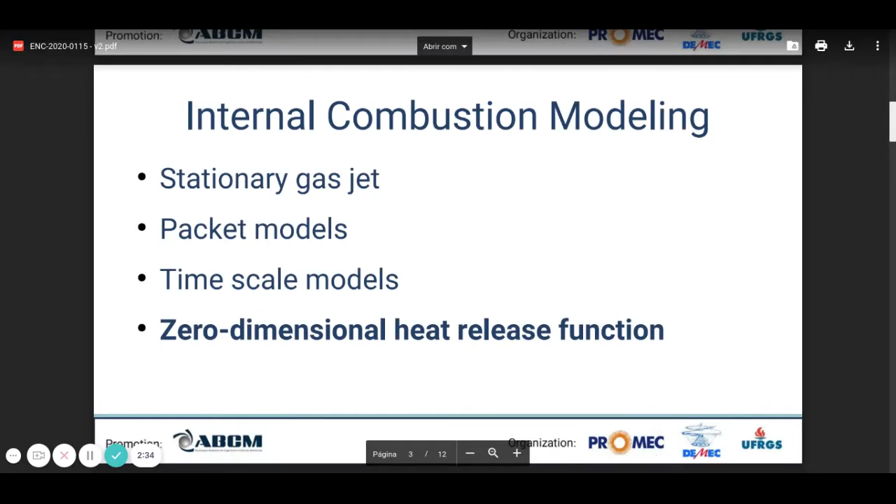Let's talk about commercial software. There are several commercial software for internal combustion modeling. We have Ricardo Wave, AVL Boost, which actually uses a zero-dimensional heat release function, Diesel-RK, and Los Alamos National Laboratory has their own Kiva. This is a very important laboratory in the US.

Here is the schematic of a diesel engine. We have the valves, we have the piston, which goes from bottom dead center to top dead center, and it's connected with a connecting rod, which goes to the crankshaft, and in each stroke the piston goes from bottom dead center to top dead center.

Usually diesel engines have 2 or 4 strokes. In general, diesel engines have 4 strokes, and they are: inlet stroke, compression stroke, combustion stroke, and exhaust stroke.

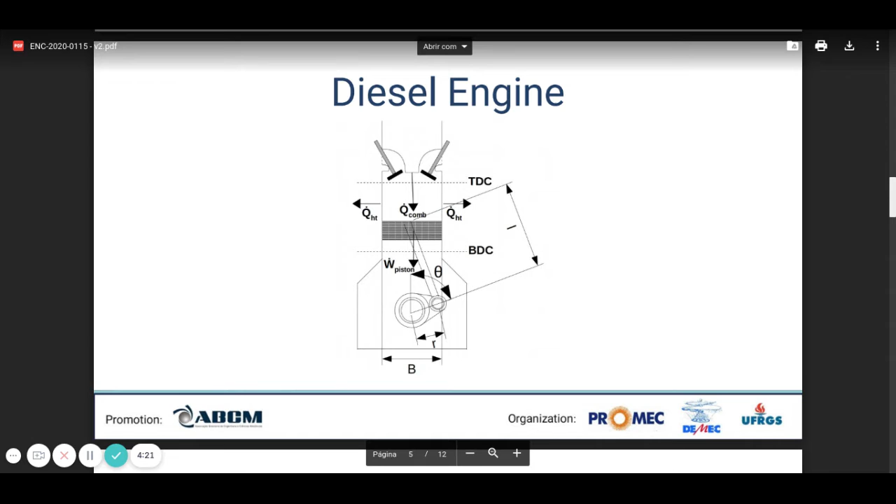But in this article, we are just going to discuss the compression stroke. Following here, we are going to discuss the model. This is the numerical model for the compression stroke of a diesel engine.

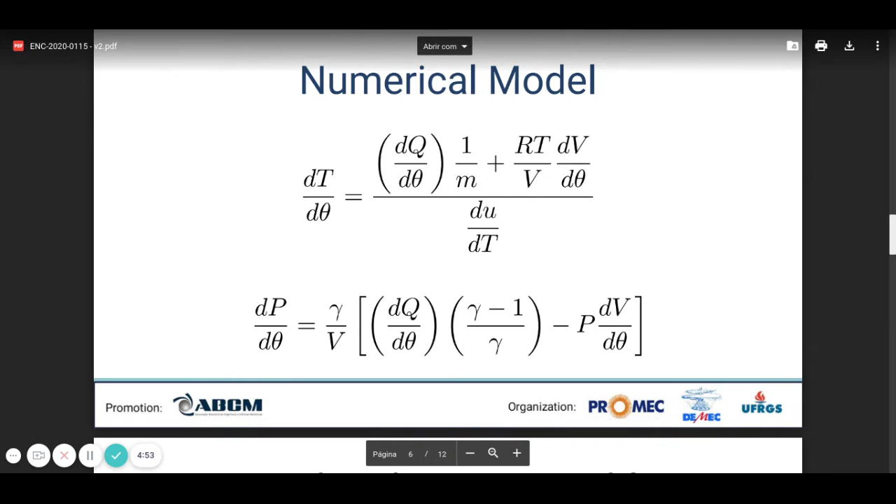As we can see here, we have two ODEs for temperature and pressure, and many parameters here, and we can solve those ODEs using numerical methods.

Let's talk about a crucial difference, very important for the present article. We have the forward problem, which uses numerical analysis to solve the coupled ODEs as we have seen before. So we select parameters, we have the ODEs, and we use the Runge-Kutta algorithm to retrieve pressure data during the compression stroke.

First of all, we solve this so-called forward problem, and we create a pressure curve for the compression stroke, and we add noise with a Gaussian distribution. This is what we call synthetic data.

The main problem here is to solve an inverse analysis. What is an inverse analysis? We have this synthetic data, as mentioned before, which was generated by the Runge-Kutta algorithm.

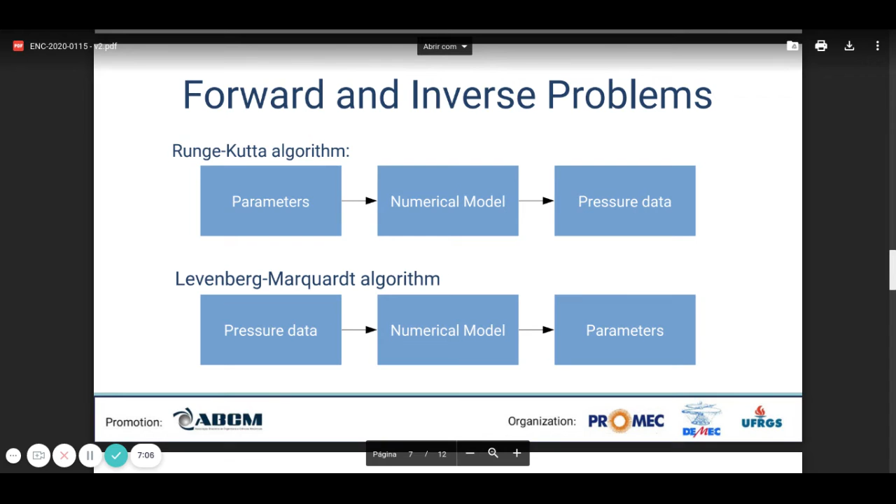We have the numerical model, and we perform inverse analysis using the Levenberg algorithm. With this synthetic data and the numerical model, we have an initial guess for the parameters, and after iterations during the Levenberg-Marquardt algorithm, we retrieve the initial parameters that we used in the Runge-Kutta algorithm to generate the synthetic data.

Here we have the diesel engine parameters, which we have used to create the synthetic data.

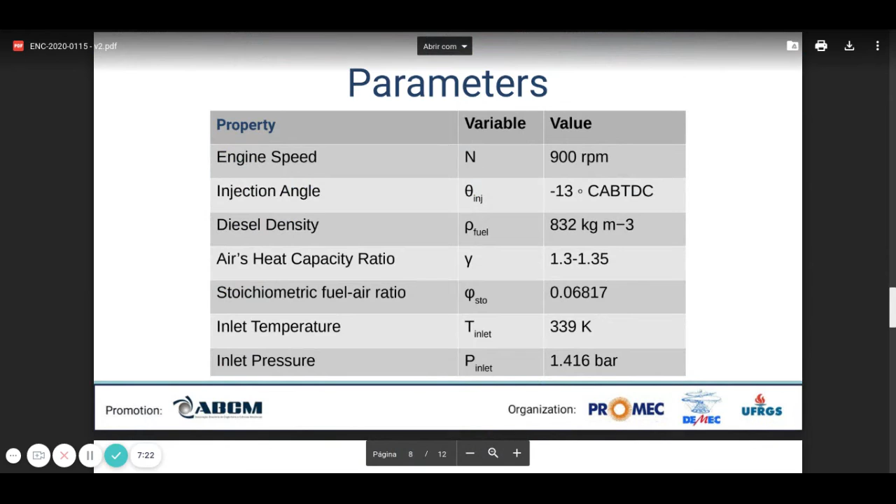As mentioned before, we create the synthetic data using the Runge-Kutta algorithm. We have here an initial guess, which is like 90% of the exact values for the initial parameters of pressure and temperature. As we can see here in row 1 are the exact values used to create the synthetic data.

On the second row we have the initial guess, which is like 90% of those exact values, and the estimated values on the third row. On the fourth and final row, we have the relative error from the retrieved values. As we can see, the relative errors are less than 5% for both of the parameters. It's a good result.

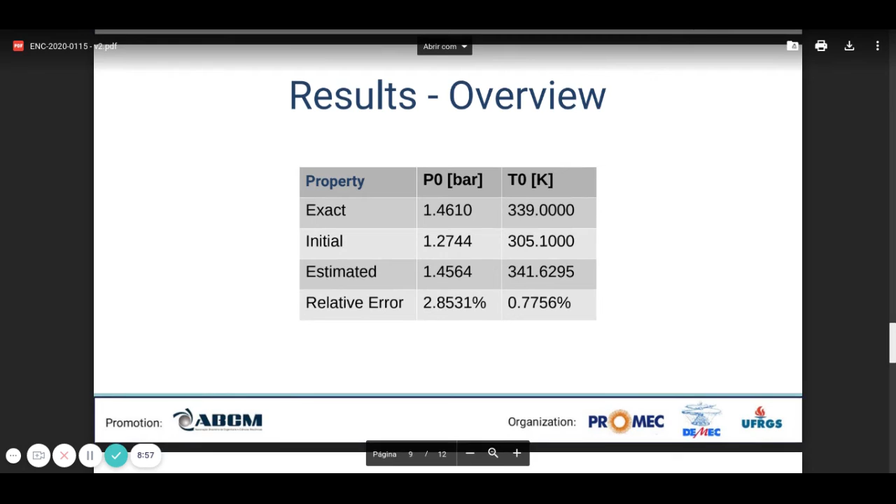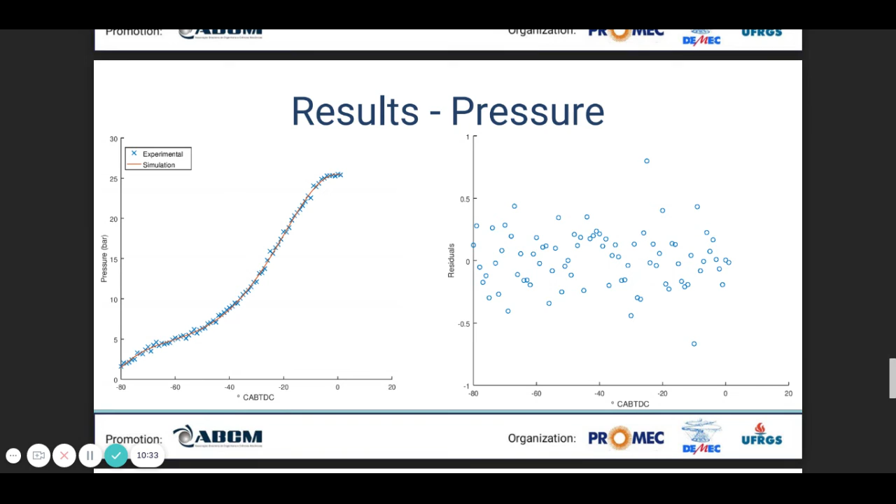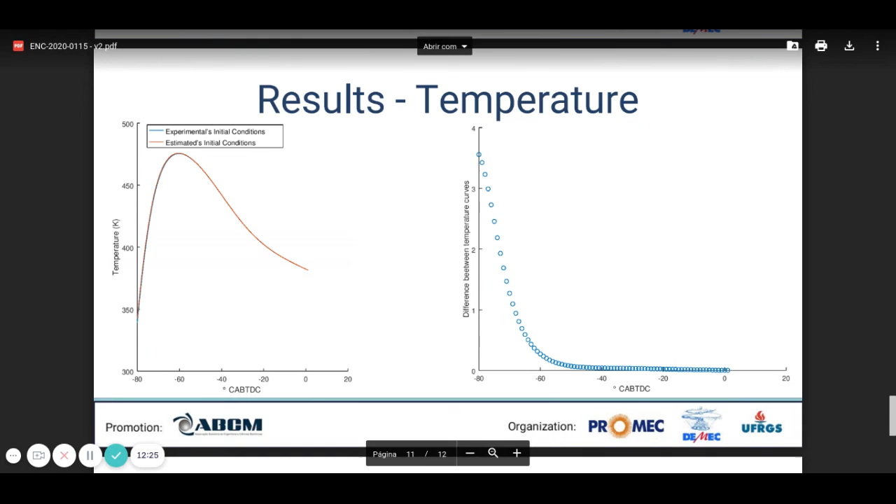After this change, it starts to converge. I'm going to discuss a further investigation in my master thesis regarding this mathematical phenomenon here.

Let's keep going on the future work for my master thesis. As I just said, a further investigation with the temperature curve is needed. Of course, we have experimental data, and we have proven that we developed an interesting tool for inverse analysis during the compression stroke. But the internal combustion engine doesn't have just one stroke - it has the combustion stroke, inlet stroke, and exhaust stroke as well. So further research using all four strokes must be done.

And that's all for my presentation. I hope everyone enjoyed it.